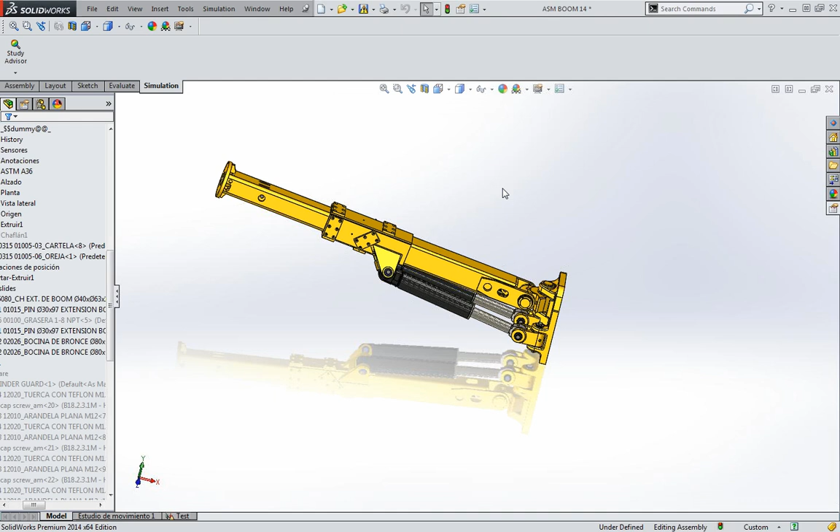So, Jeff, look what I designed. I don't know what it is. It's a boom. So this is a part of a, it's called a resin machine, which helps people who do mining. At the end of this boom, there would be a grate that protects people from rocks falling in caves. It's a very important boom. Safety tool. It's a sweet name.

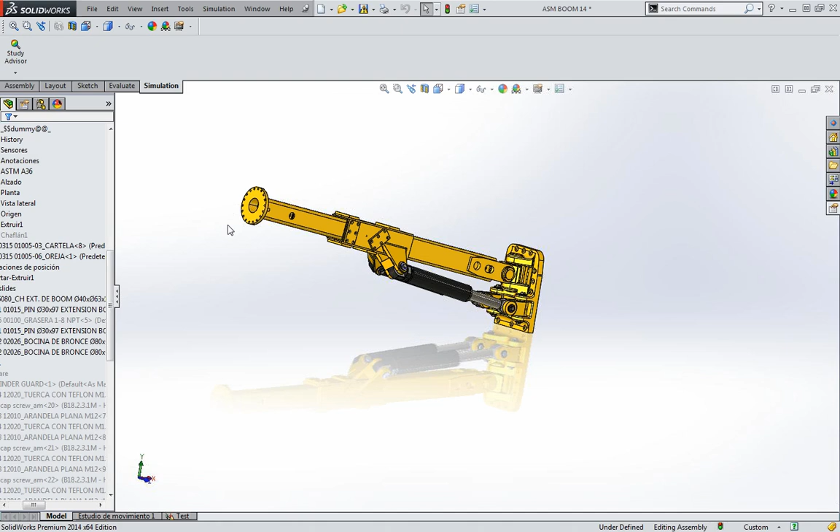What I designed on this boom is this knuckle. It's a small part of a big assembly, but it's very important because it controls all these hydraulics. So I have to make sure that I have the right mass, the right support, all the guts to this part. I have to make sure I engineer correctly so this boom does not fail. I don't want a cave falling on somebody.

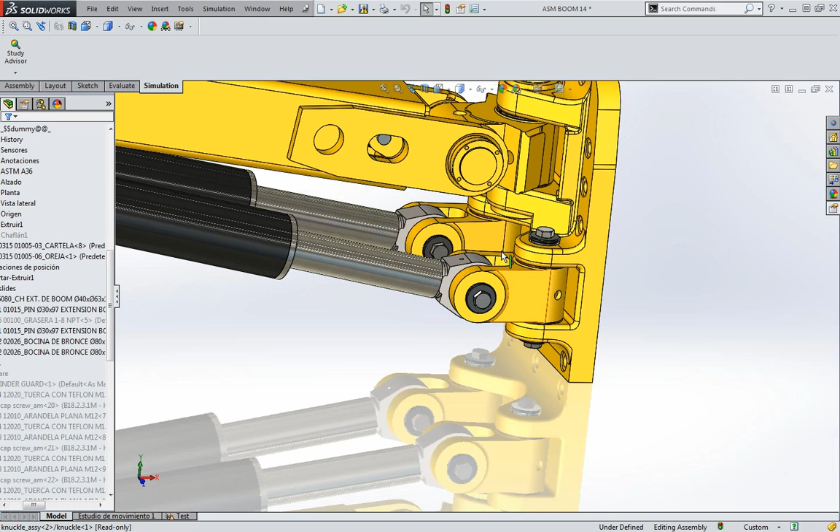That's on me. That's really on this knuckle. So I have taken this design. I'm happy with it. I'm pretty sure it's perfect. And I sent it out and had your guys print me a prototype. So they printed me this nice prototype. It's a nice blue, nice looking prototype.

I'm happy. I'm going to my boss. I'm saying, this is the knuckle. It's a good knuckle. It's exciting. So I'm on my way to my boss. My phone vibrates. I get an email from our analysis guys. Never good. They were really smart guys.

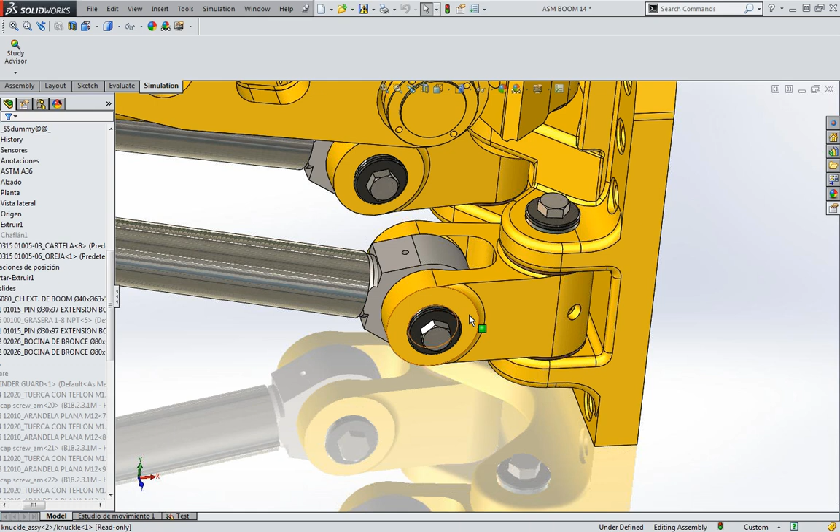So what they sent me is this video saying, hey, Tom, good try, but your knuckle's not really optimized yet. It's not good. Not a good knuckle. It's an okay knuckle, but it's not optimized. So they sent me this very detailed video, and they're using SolidWorks Simulation to go through and run an FEA analysis on this knuckle.

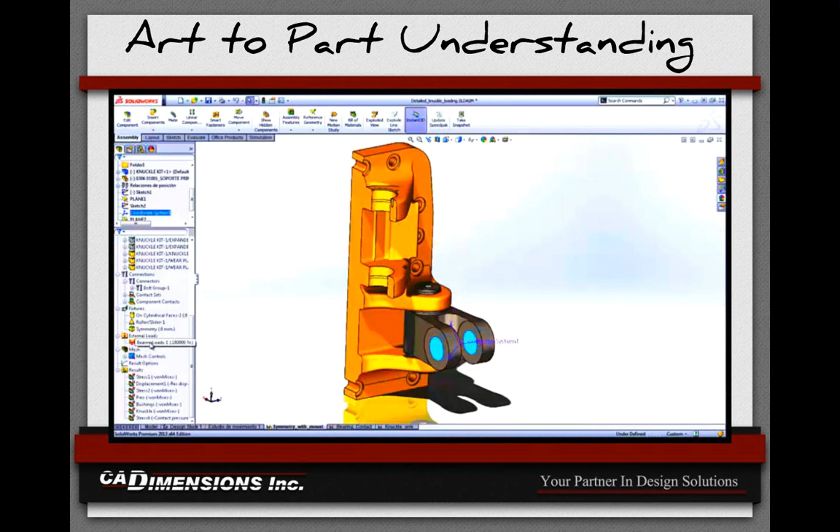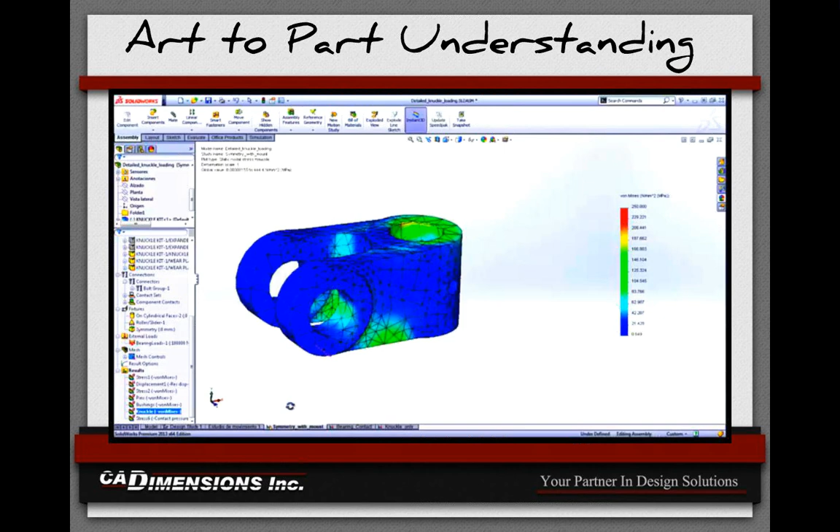And what they're going to do is use that tool to say, is this really the best knuckle for my boom lift? So they looked at the stresses that are coming through here and what are supporting the hydraulics of my knuckle. They ran it. It looks pretty good as a sub-assembly here. The pin that supports the hydraulics, there's no red, so that's promising. Some of the insides have a little red, and down here, some little red, but nothing to the point of failure. So this knuckle's okay.

But really, when we look at it as an individual, we realize maybe it can be a little bit better. Everything is better. As an engineer, I agree with you. Everything can be a little bit better.

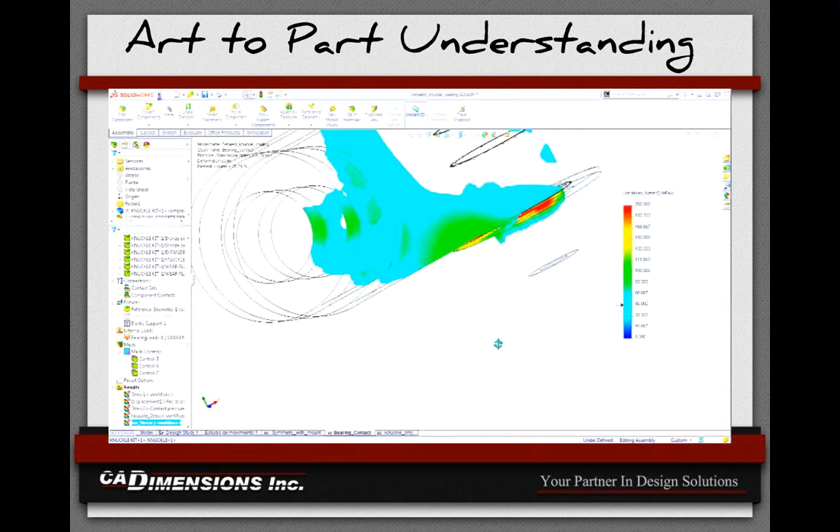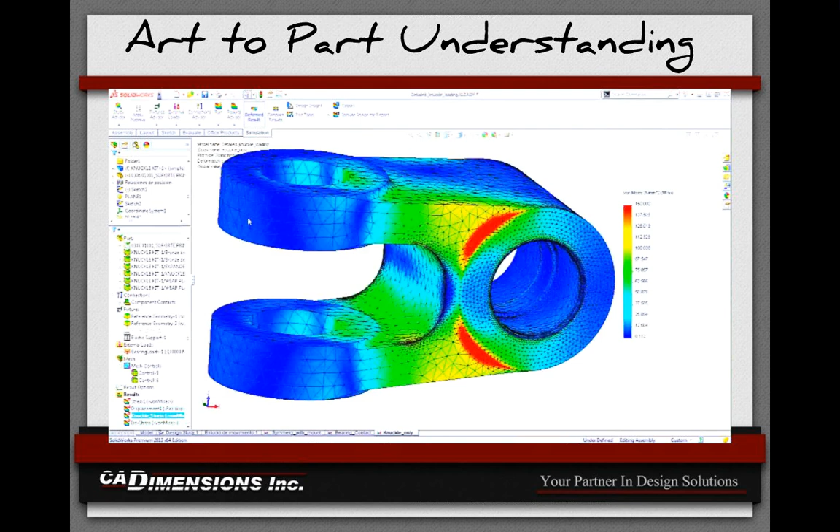So running this analysis, we're going to compare it to our full assembly and our individual part and make sure that we're not missing any pieces as far as an analysis goes. We want to make sure that every piece that we're touching is correctly analyzed and that we're editing the part in the best possible way. So again, we're trying to optimize this part to be the best knuckle it can be. It's like be all you can be. It's a great slogan for knuckles.

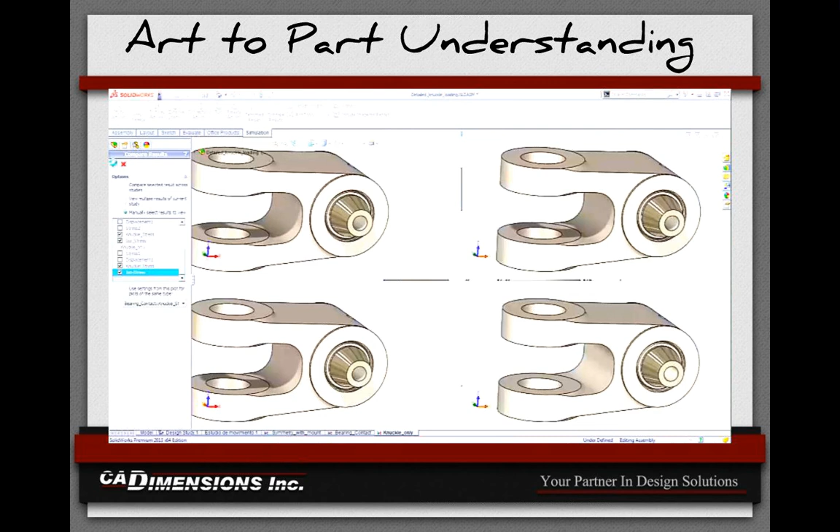So the analysis is run. On the left side, we have our full assembly. On our right side, we have our individual knuckle. We can see that our analysis is pretty close for both of them. So now we want to optimize this part. We know it's not going to fail in the field, but we do want to optimize it. So what we can see is our radius here is pretty wide. So we're using up a lot of material in this area, and it can be better.

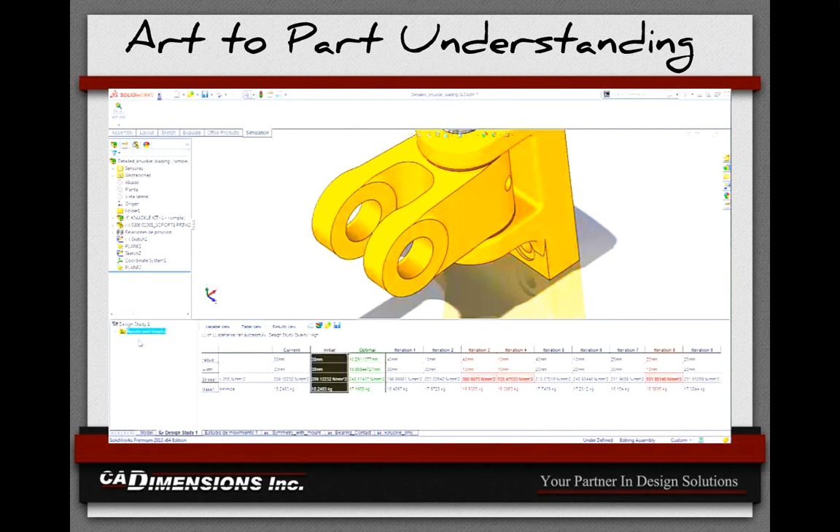So what the FEA guys ended up sending me was this analysis saying, hey, maybe you should come back and look at this radius. We can probably reduce the weight of this, keep our efficiency, and reduce the cost of our overall product. And as you saw in the boom, we have multiples of these. So the money we can save on one is going to translate to the money that we can save on all of them. It's very important. Money is important. Your feedback in this situation is wonderful.

So what I'm going to do is jump back into SolidWorks and look at the analysis they sent me and try to tweak my knuckle. So the design study they sent went through 9 iterations of different settings. They played with a radius anywhere between 10 millimeters and 40 millimeters. They played with the width between these two arms, anywhere between 10 and 30 millimeters. And they wanted to keep the stress of this under 250 because that's when we saw the red.

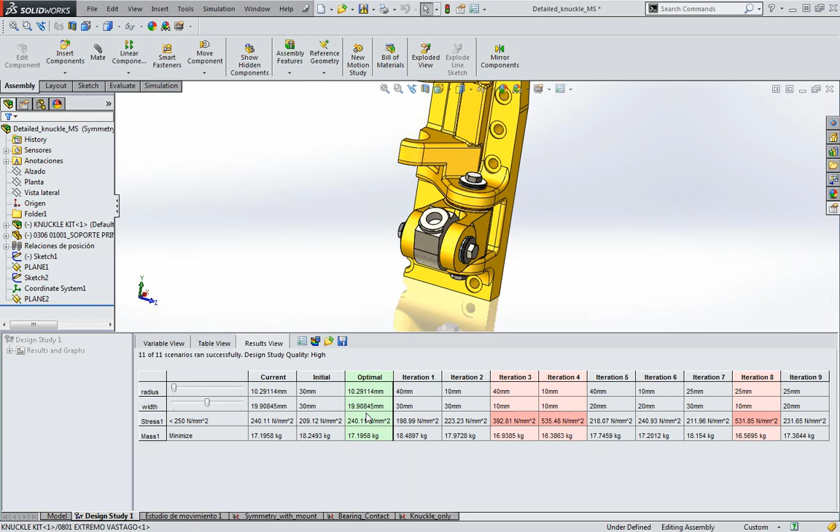So we know that at the red at 250, this product's going to start to bend and give a little bit. We really want a sound product. And our end goal here was to minimize our mass. So we want to make the cheapest and strongest product that we can. So given these optimal settings, out of all 9 iterations, our radius really needs to be reduced down to 10.29 to be precise, but I think we're going to be okay with 10.

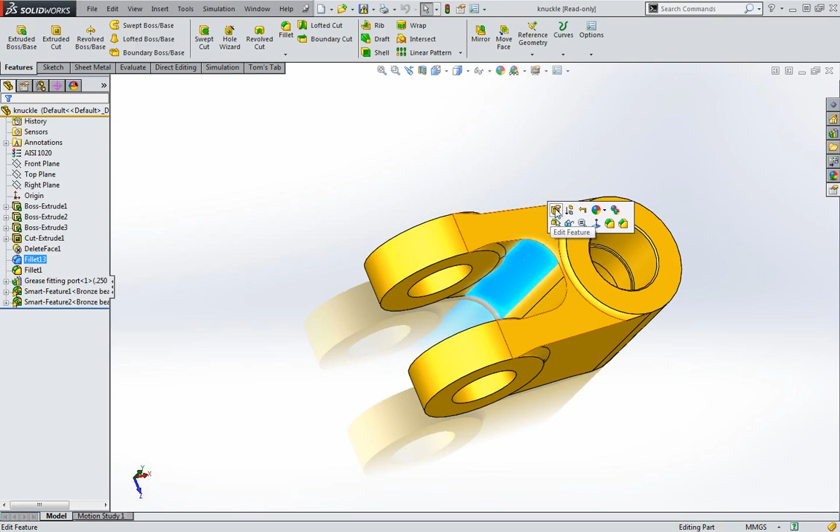Big mining community. So I now have my part, and I'm able to edit it right out of SolidWorks. So I know it's going to be this radius. I'm going to click Edit Feature, drop it down to 10, make sure that looks like my optimal setting, accept it. That looks pretty good. Now I'm happy. I'm ready to go to the boss with my new prototype. So can you print this for me now?

Not yet, Tom. I need an STL file. Always forget about the STL file. Most important thing in printing. It really is.

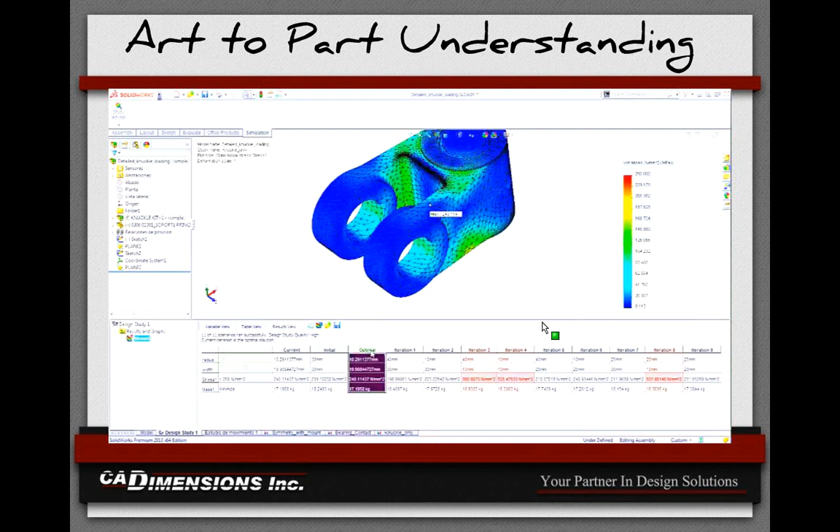All right. So, even though I had my part, it's really not ready yet. What I need is an STL. And what everybody out there needs to know is, what the heck's an STL? Get that question every day. What is that? So an STL is a file type that all 3D printers really use. Pretty much universal. It's a universal file type.

And what it's doing is pretty much creating information of a 3D model by approximating multitudes of triangles across this product. So it's going to translate the data of your 3D model, regardless of program. SolidWorks is very good at creating this STL, and giving it a file type that can be sent to a printer and actually printed. But before you just click Create STL, you want to do a little research into how to optimize your STL. STL file is just as important as the actual printer itself.

Is it really? Start with a bad file, you're not going to get a good print. Exactly. I'm sure you've seen many failed prints from a bad STL file. Every day.

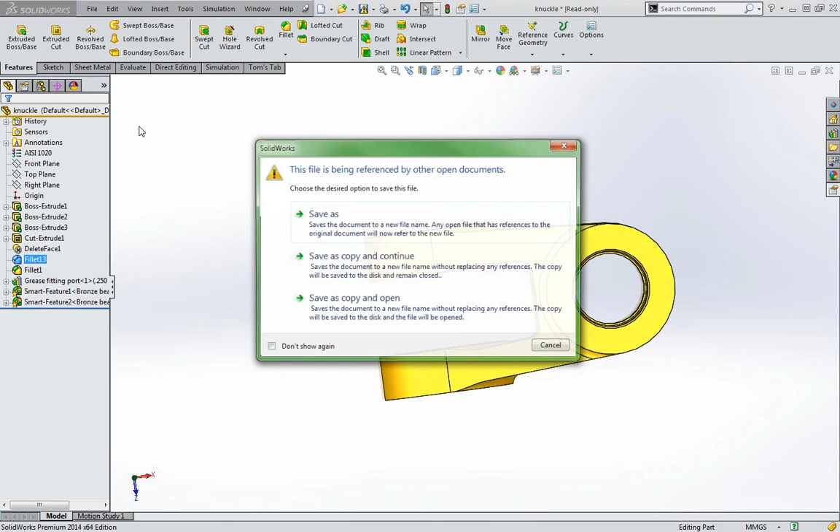So under File, Save As. I'm going to save as a copy. Instead of saving out as a part, SolidWorks, as you know, gives you a plethora, a lot of choices of features that you can save out as. I don't know what those are. You don't know what these are because you only care about the STL. That's true. It's the most important part. It's very important to me. So I'm going to make my knuckle for Jeff. Save it out to my desktop.

But just saving out the STL isn't the only thing. As I was saying, there's options here. Wait, you can't see. There we go. There's options here. There's a couple different output types. Binary is going to be your most common. ASCII is a different type that generates your content a little differently. Both are printable, but binary is just what we see.

So now you have some options between coarse, fine, and custom. So this deviation and angle is going to be what generates your 3D model and the quality of that 3D model. So a coarse selection here, as you can see, my rounded edges aren't round. Lots of faceting on that. A lot of faceting. When I go into my fine, this is looking pretty good. I got an angle about 10, a tolerance of, what's that, 1.15.

Still not bad. When I can come into custom though, this is when I can start tweaking it to find that perfect area. So right now, I'm at my minimum angle, which is the best part, that's a 1/2 degree, and I'm at my smallest tolerance, which is at 1/100. So real small tolerance there. However, what you'll notice here is the number of triangles that I just created between fine, which is right around 8,000, and custom. Let me tweak that back up to the best.

Right. Just a quick example of what those look like. So here's a sphere with a coarse setting, a fine setting, and a best setting. So our sphere here, lots of faceting. It doesn't even look round. You have flat faces all over the place from those triangles, doing the best they can with the settings. But with an angle of 30, you're not really going to get that shape.

Our fine does look pretty good. It definitely looks like a sphere. There's some faceting, but that may not come out in the print job. It may not. The first one definitely would. You would see that. And people would blame the printer when it's actually their file. That is the bad thing. Exactly. I'm sure you get many a call saying, this printer is garbage. It's really that STL file. It is the STL file. It's the STL file's fault.

And our final setting here is the best setting, which is the 0.5 degrees with, I don't even know what that is, 2/10,000ths of an inch. But our file size jumps from 300 megs all the way up to 25 gigs. So if you're trying to send this out to a customer, if you're trying to actually just process this alone, it'll take some time. It'll definitely take some time. You'll get a clean product, but is it worth it, or are you okay with that fine? Again, you're always looking for that happy medium.

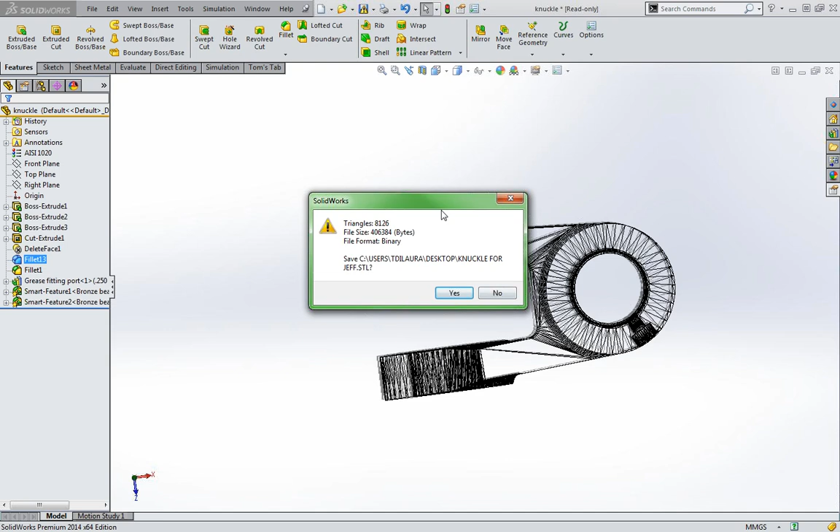Happy medium. All right, Jeff, so I'm going to save out my STL file. I got my fine setting. I'm happy with that. I'm going to click Yes. Save it to my desktop. Look at that. You can see all the triangles. You can start to see what this product's going to look like when it prints. Can I print now? Well, before you print, you got your STL file. You have the most important part.

We kind of have to decide, what are you looking for out of the part? What's important? And what technology would be best suited to print this model that you need? Do you need functionality? Do you need good aesthetics? Do you need smooth surface finish? Do you need rubber-like materials? A lot of different options that we have out there that you can examine and decide what option would be best for you on each individual part. So I didn't really get those options with this part. I just said print them, and this is what they gave me. So can you explain some of those options for me?

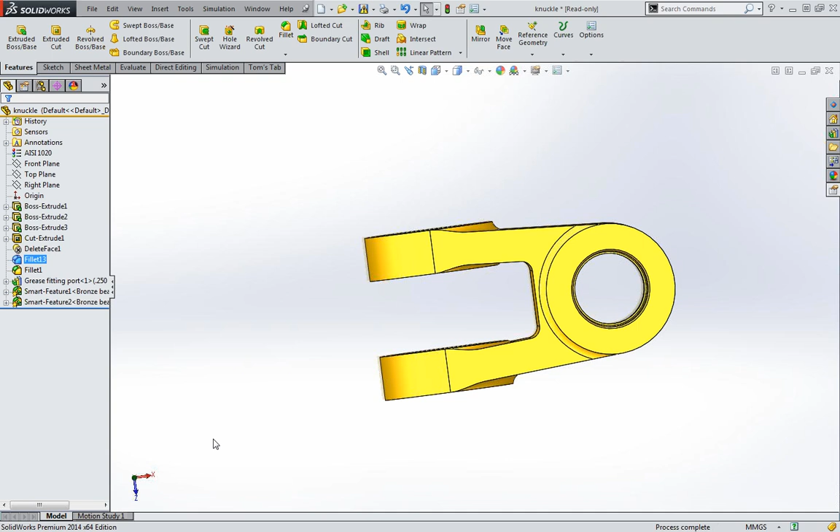Yeah. We can go through the two different technologies that we have to offer. The first technology is going to be the PolyJet technology, which is one that a lot of people aren't that familiar with. It is a technology that's based off the inkjet. So it's very similar to an inkjet printer, in the idea that we're using an inkjet head that's jetting little balls of photopolymer, and then it's curing that by UV light.

UV light. It's not good for you. Very fair skin. I have to be very cautious of UV light. That's why we keep you away from the machine. That makes sense. There's no danger. Not going to get sunburned by staying next to the machine. I'm going to wear sunscreen just in case.

But the PolyJet systems print very fine detail, where on other technologies we're printing at like 10,000ths. On the PolyJet side, we're printing at 16 to 30 microns, so very, very small. And we're able to print in flexible rubber-like materials as well as transparent materials and a wide variety of different types of materials, so we can simulate a lot of different plastics. It's really meant for the companies who are looking for a nice-looking prototype right off the machine, very detailed, and aren't going to require a lot of mechanical capabilities out of the product.

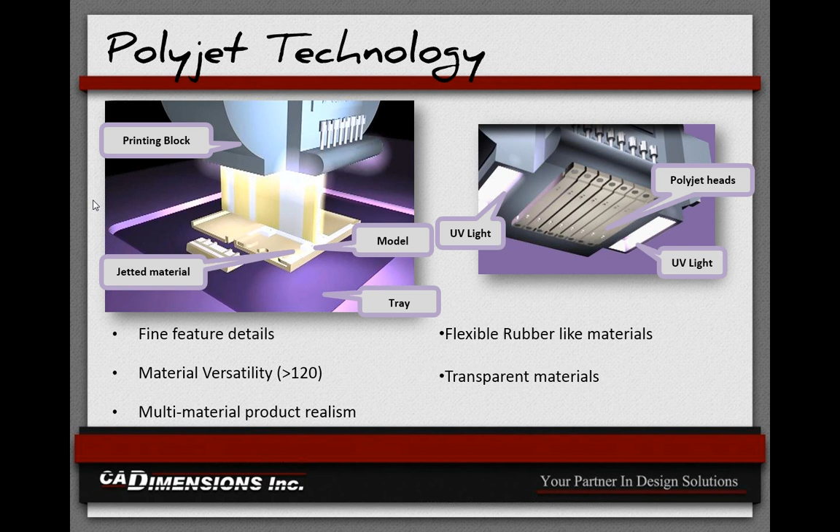Gotcha. But I don't know if that's the best for my knuckle. I mean, this has got to be in that boom. So you're going to need some functionality. I need some stiffness. I need some real mechanical properties. Well, on the other side of the fence, we have what's called our FDM technology. FD what? FDM stands for Fused Deposition Modeling. This is probably the most common technology that people are aware of for 3D printing because it's the one that's involved in all of the consumer products you see out there, like the MakerBots or the kits that you see.

Basically, think of an extremely accurate hot glue gun that's extruding thermoplastics. So our material starts out in filament form, if you can see it. Oh, looks like weed whacker stuff. Yeah, weed whacker line will not work. It does break your machine. People have tried it. It does not work. It's a special formula that they've come up with. But basically, you take that spool of material, you put it in your machine.

It's heated, put into a semi-molten state, extruded through a small diameter tip, as you see on that screen, and it lays it down layer by layer onto a build platform. And it toggles back between model and support. The neat thing about FDM is that we're dealing with thermoplastics, the real materials. On the PolyJet side, we were dealing with materials that were simulating plastics. On the FDM side, we're actually dealing with real thermoplastics. So we can get high-performance plastics that are industry-ready, so you can take that knuckle out and field test it in the real environment and see if your design is going to stand up.

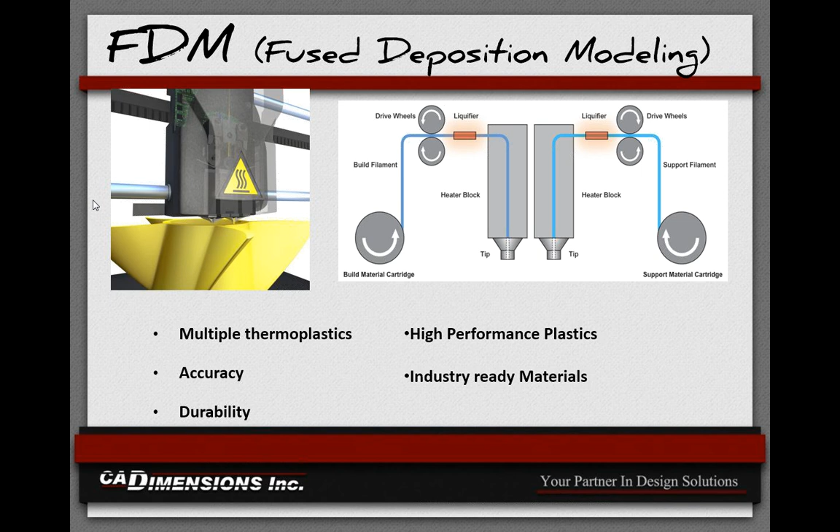Perfect. So what material do I want for my knuckle? Well, that's the next question, Tom. There's a lot of materials to choose from. So on the FDM side, we have a wide range of different thermoplastics, many different grades of plastics, from standard to engineering to even some high-performance plastics. In our standard plastics, we have our ABS M30 or ABS Plus, and that is pretty much our go-to material. It runs on all of our FDM systems. ABS is one of the most injection molded materials in the world, and for the most part fits everyone's needs for functional testing, concept modeling. It's a really well-rounded material.

So Tom, got a little stick here. Is that going to be strong enough for you? I mean, this looks pretty good. It's got some flexibility. Josh, great. Josh, my knuckle's saving lives, and you're giving me a part that I can snap? Well, hey, you never know. Maybe we'll try something else. All right, maybe we'll move into our engineering plastics and see what we have. Maybe that would be better for me.

One of the newest things we have is the Nylon 12. That sounds cool. Yeah, nylon is a very popular material. The great thing about nylon is its flexibility and its resistance to break. So let's see if we can break that one. All right, let's look at this guy. Whoa. Now we're talking. It's unbreakable. Got some really good flexibility, but imagine my knuckle being all flexible like that. If the hydraulics bend it, it might not work out well. That's still not the right part for me. Okay. What else you got?

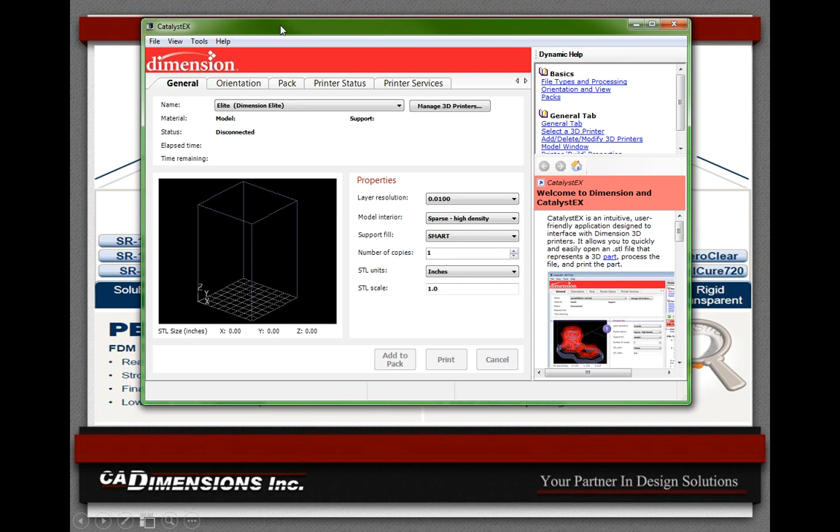So basically I'm going to go File, Open STL. I'm going to find that file that Tom made. Dirty desktop here, that's where I got a lot going on. Bring it in. Tom, it's a little big. A little big for the machine I have. Yeah, let's scale that down. That could be my design. Okay, yeah, designer fault.

So you can see every time you bring an STL file in, it's actually going to bring it in the orientation in which it was exported out of your software. And that orientation is not necessarily going to be your best option. But before you do that, you have a couple different options when you're dealing with systems. You can choose different layer thicknesses. This is dependent on the machine you're using as well as the material. 10,000s for our FDM system is usually

the go-to one. But for your case, if you're functionally testing this, we're going to want to use a solid interior. I'm not going to want a honeycomb, so we need nice and strong. Oh, nice and strong. We want the inches, we want one copy. We're going to use the smart support, so it's going to use the least amount of support material it can.

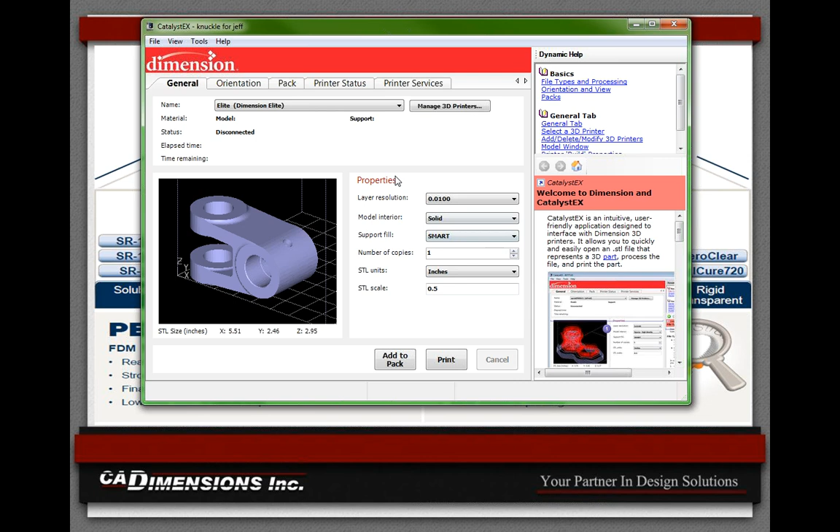Nice. But with your orientation there, isn't this all going to be support material here? Yes, it can't just float here. I can't build something in 3D space without supporting it. But is that the most cost effective? It may not be. It may not be.

So orientation, Tom, is the biggest learning curve when using additive manufacturing or a 3D printer. It's going to affect your build time, your strength in X, Y, and Z, as well as the amount of material you use. So if I was looking at this part and I didn't want to have to support this whole angle, I would think, okay, there's a new orientation that would be better for this. So what I can do here is select this, select the face. Bam, there you go, that makes more sense.

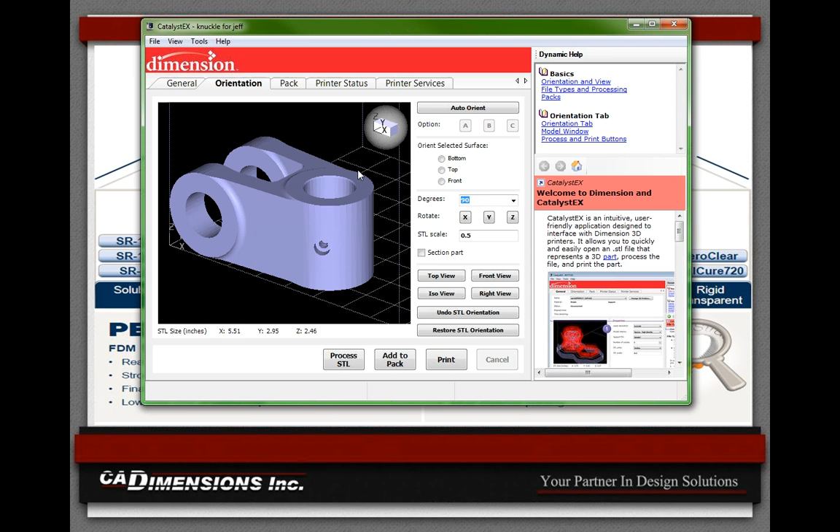So this is all going to be self-supporting, and I'm only going to have support material here and then on the bottom. Cool. So once I select the orientation that I want to build in, all I have to do is hit Process STL. And the software is automatically going to create the toolpaths needed for my model as well as the support material. So it's all hands-off. So we're talking 15, 30 seconds, maybe a little bit more with a complicated part. That explains why even you can do this. This is why I can do this.

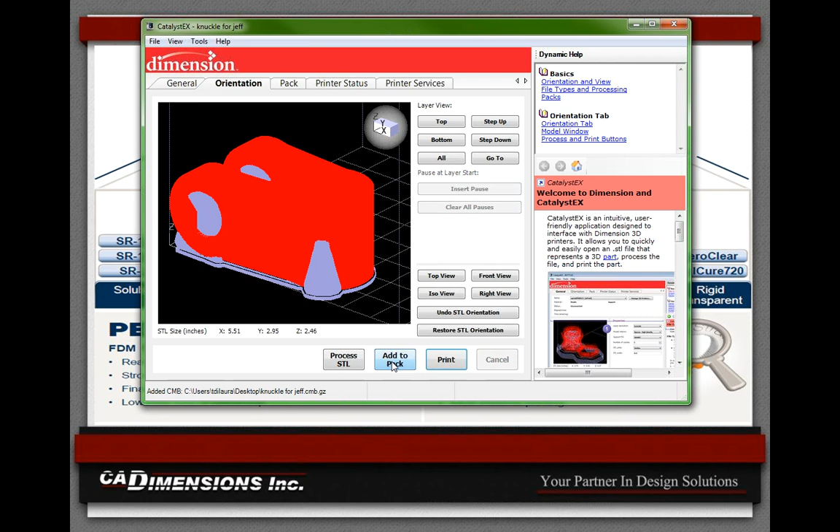The red material here is going to be your model material, the actual object you're building, and this purplish gray is going to be your support material. So once you have it processed, all you have to do is add it to your pack. And the pack is basically your build platform. So this is actually what your tray would look like on your actual system. So you can move it around wherever you want.

You can bring all the files in here, and all you're going to do is hit print. And if it was connected to a printer, it would send it over there, and all you have to do is go hit the print button and go home for the day and not worry about anything. So it's pretty simple. Perfect. So I know we got a printer right over there. We do. We have a couple. We got a couple right in the house.

So hit print. I'm ready for my model. I got to go see my boss. There you go. Print. Can I have my model? Now we're talking. I got my new shape. I got my minimum radius. This one's way lighter than this one. Way lighter. And it's SU colors. So SU colors. I'm a happy guy now. I'm going to go see my boss with this guy.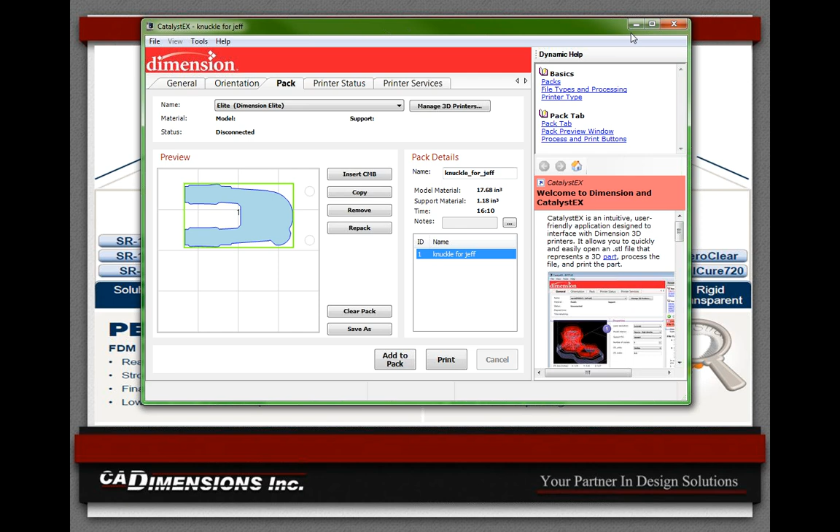So, Mike, tell us a little about what you do over at the Fayetteville library. Yeah, well, what's really exciting here is that we have 8 total 3D printers. We have the MakerBot Replicator 2s, Replicator 2X, a couple old Thing-O-Matics, and we got a 3D Touch. But really we see the most use out of the Replicators. And what was nice was that we now have SolidWorks, a 2012-13 license, actually from you guys there. And you guys have been very helpful with setting it up and some training.

And what we've been trying to do is get the community interested in 3D design and get them to learn the layout of the software itself, what 3D design is and how it works. And it's starting to take off. We've only been open since September, but we now have an adult robotics club, and they're embracing SolidWorks design components, making wheel hubs and gears for their motors, and some of the casing. So it's been pretty exciting what they're doing.

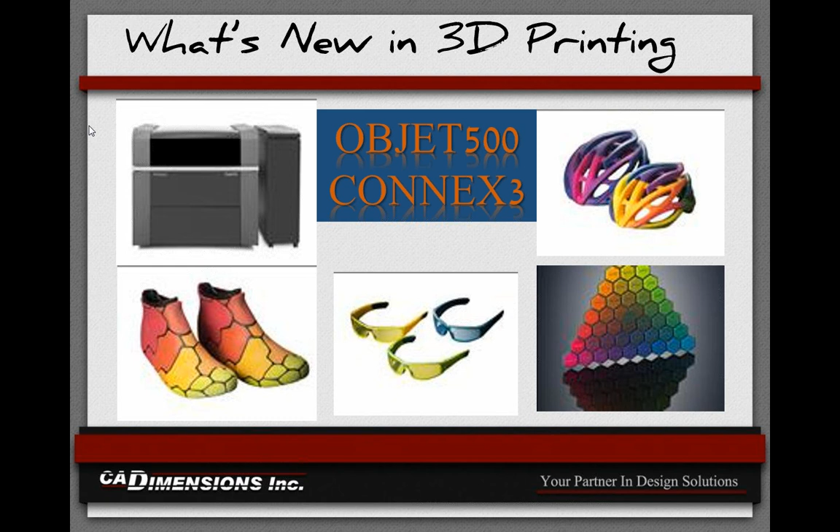All right, guys. So with that, I think we're down to questions. Let's see what we have. What is the resolution for temporary injection molds? So it's got to be the same resolution as the printer, right? Yeah, as far as the minimum wall thickness, it is 0.6 millimeters on the PolyJet side. It's pretty small. Some of the details, a clear part on TV isn't great, but you're getting down to the nitty gritty of the details in this injection mold. So complex parts are very easy to do.

Your temperatures for injection molding are going to range up to 300 C, and the amount of shots you're going to get on a given mold will depend on the pressure and temperature of the material that you're molding. But it is a well-developed application that we do have a lot of information on. So if you are interested in it, please feel free to contact me, and we can get you the white paper that Stratasys has made for it.

Very cool. Other questions? Andy DeLore cannot hear. I think we fixed that. Yeah, so we answered that one. Any other questions out there from our studio audience? I think we were so efficient. No more questions. That's nice. Full of information. Means it's the perfect PowerPoint and explanation. We covered everything. That's great. You can say we're done.